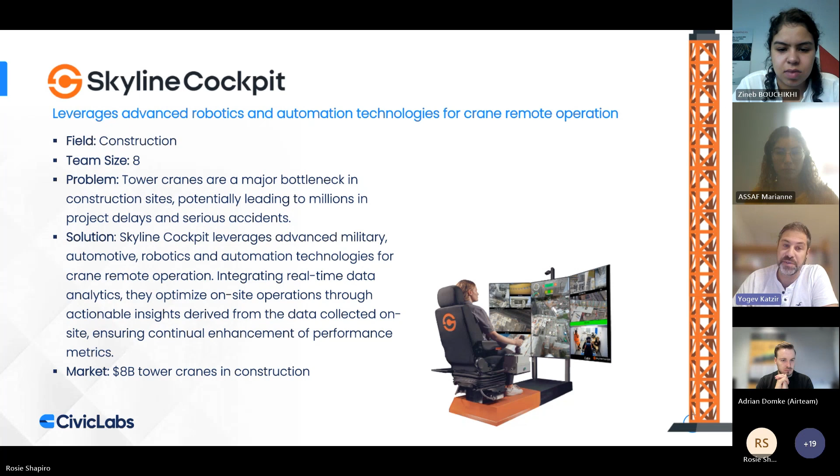The second component of Civic Labs activity includes structured partnerships at the local, regional, and global level. We have created a circle of global strategic partners, the largest and leading business corporations in the industry. We are open to collaborations and invite each and every one of you to reach out, to engage, and to follow our activity on LinkedIn.

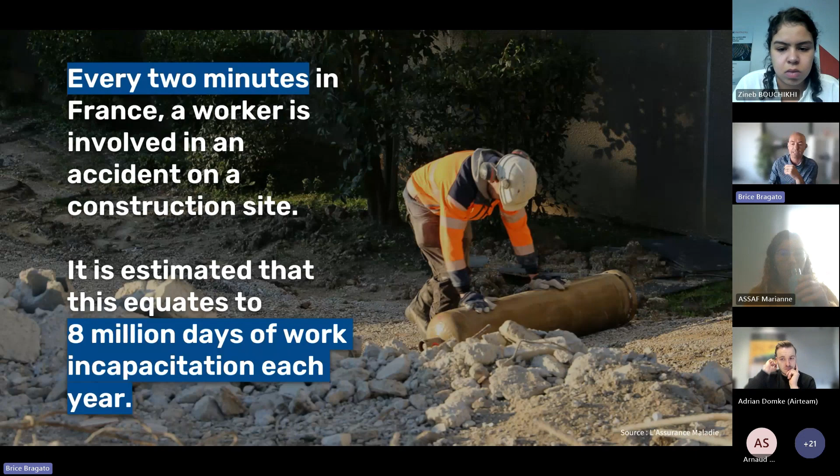To continue on this perspective, to give you a clearer picture: 8 million days lost every year means thousands of team members are off-site daily, causing both operational disruption and safety challenges. That's the most important, of course.

What can we do to make construction sites safer? Historically, safety actions on construction sites have been only reactive - that means we deal with accidents after they happen, and the damage to the human is already done: financial, physical, and emotional. The solution for us is prevention. We can save lives, reduce injuries, and avoid additional costs by stopping accidents before they take place. That's what I'd like to explain.

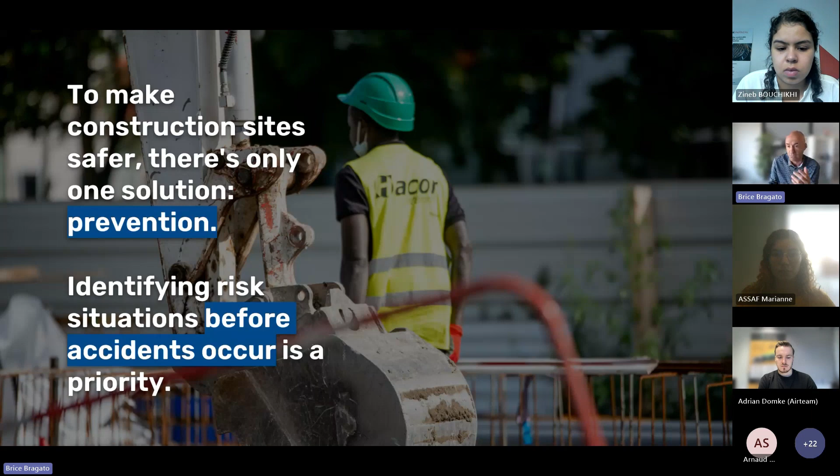This trend is confirmed by major companies in their health and safety policies as a top priority, and the objective is to get to zero accidents on construction sites.

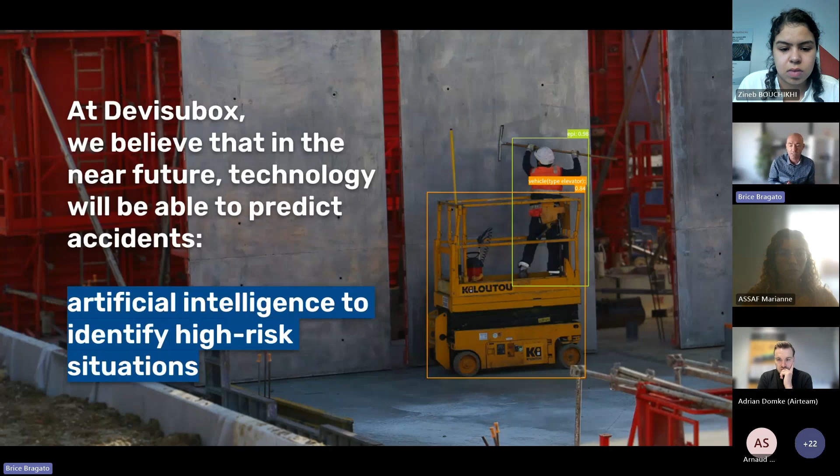This is where technology, and especially AI, comes into the game. Thanks to AI, we now have the capability to monitor construction sites in real time and detect risky situations. AI allows us to focus on risk detection by implementing an automated process, helping human decision-making and safety supervision, and of course catching potential dangers before they happen.

That's why today, after this short introduction, I would like to present you our HSE monitoring platform, and I will use a quick demonstration to show you that.

So I will move to the platform here. Now you are able to see my screen and the HSE application. This application, this platform, is already in production, but only in a dedicated hosted mode, because we developed it 2 years ago to answer a worldwide RFP, which we won. That's the reason why this platform is already in production.

But the goal of Devisubox is to develop a new platform, multi-client, to host all the requests we have from the market. So what's happening with the HSE monitoring platform? First of all, when you connect to the platform, you have access to all your projects - it's like a construction site map. Depending on your privileges and rights, you have access to current projects, past projects, and so on. Today I will show you a project I know as a good example, so I will move into this project here.

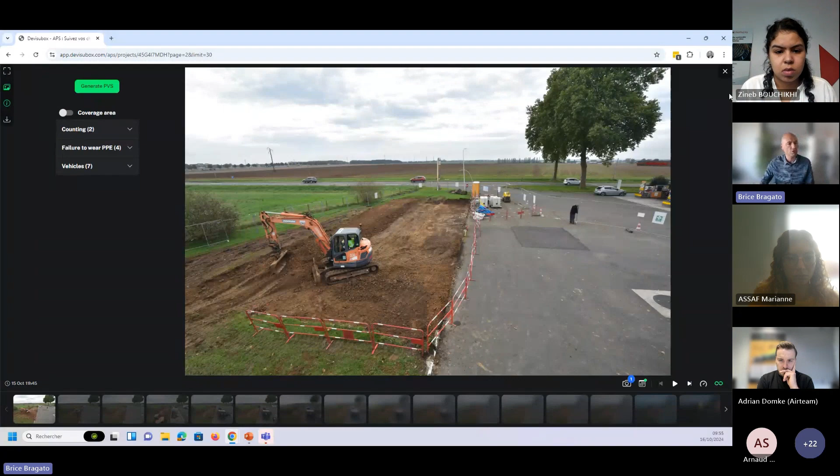At the top of my screen, I'm able to filter what I need to see, what I need to check. For example, if I am a safety manager, I don't want to move picture by picture. Maybe the most important priority on my construction site is to double check if the helmet is being worn properly. So what I'll do is move to the helmet filter with at least one people here. Sorry, mistake, I need to go to my first page. So helmet with people, and I will only see all the images where there is a mistake with the helmet.

I can do the same with the chin strap, the jacket, the harness, and so on, but it's just to show you an example. Okay, so I'll move to my image here. This one, for example, yeah.

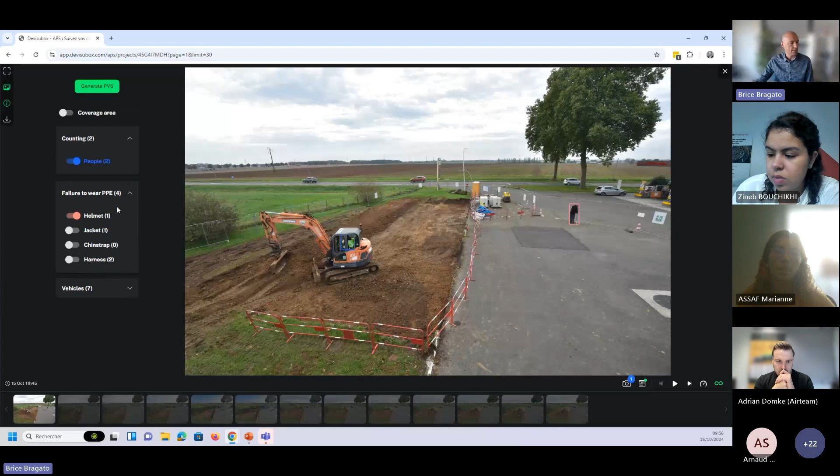On this picture, I can see now that if I supervise the selected image, I can see that my helmet filter is on, and here there is a mistake. So you have a bounding box showing you where the mistake is. And I can, with the action, of course zoom in with the photo camera, and I can see, yes, there is a mistake. That will help me alert all the people on the construction site that there is a mistake with the helmet, for example. Or tomorrow morning, before the briefing, I will be able to sensitize all the people about this mistake.

And I can move into my project. For example, this one, we can see people. The helmet is not okay for the guy in the vehicle, but it's not a problem in this situation. And here I can see people, I have the counting, 2 people, yes, 1 and 2. So in fact, the HSE platform is able to count all the people on the construction site to provide PPE information detection.

And we have the same with the vehicles. If you want, we can blur all the landscape to be focused on the construction site. So that's just an overview of the platform. I will switch now to a presentation because I know I don't have a full hour to show you that. So I'll continue here with the presentation.

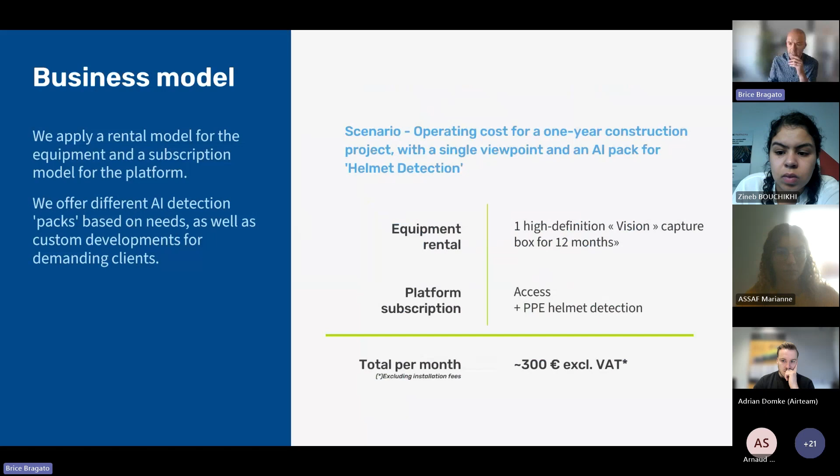And finally, what I would like to say is that at Visibox, we approach AI with the mindset of a startup, innovating, developing, improving and progressing in the market. Our mission, with this project—I'm not talking about the time lapse, we've been doing that from the past to today—what I'd like to explain is our mission is to prevent risks before they happen, and to make construction sites safer for all by providing equipment and AI tools in collaboration with a safety manager.

That's it, it's the end of my presentation. Thank you for your attention, and do not hesitate to use the chat, or at the end of this session if you have questions.

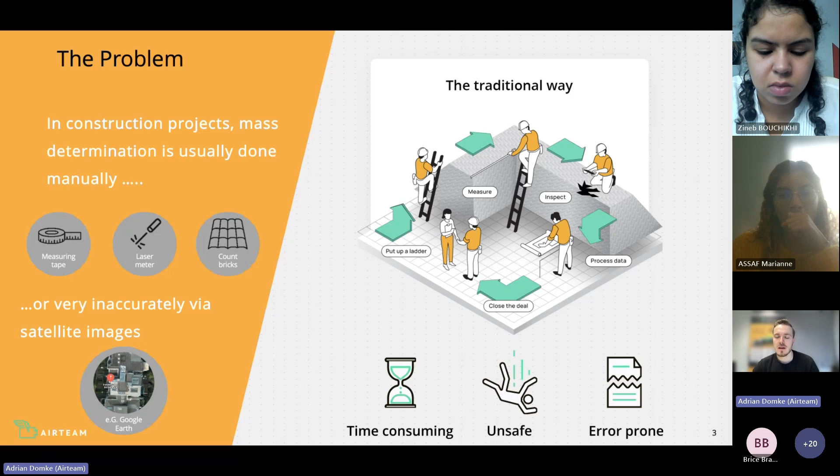This traditional way is causing a lot of problems, hiccups, reworks, and therefore also costs for the people and companies. Besides that, it's time consuming, it's unsafe, as you can see, for example, if people have to go on the roofs, and it's error prone. So if I forgot any measurements, in the worst case, I have to go back to my construction sites and retake measurements. And that's where Airteam comes into the game.

We digitize buildings and structures with the help of drone data, using the drone basically as a tool in order to get the right data. After the drone flight is done - let's say we have a big construction site of around 20,000 square meters, where we can do the drone flight in around 20 minutes - we really quickly get the data, it's uploaded to our platform, and then we use the power of AI in order to provide data that our customers can work with.

What are the pros of this? First of all, it's super fast, meaning it saves me a lot of money, it saves me costs. And my construction workers are actually doing what they're supposed to do, not measuring buildings, objects and structures, but actually doing the jobs that they want to do and that they are there for.

Second, it's safe, because no one has to take any risks in order to take measurements or get data from the construction sites. And it's standardized, so you get very high accurate data, very fast and in the safest way possible.

I just want to show you some reasons why drone data is the future of construction planning. Just really quick, some comparisons - let's talk about satellite data and drone data. As you can already see in the pictures, the high resolution of the drone data enables us to get much more information than we have with satellite.

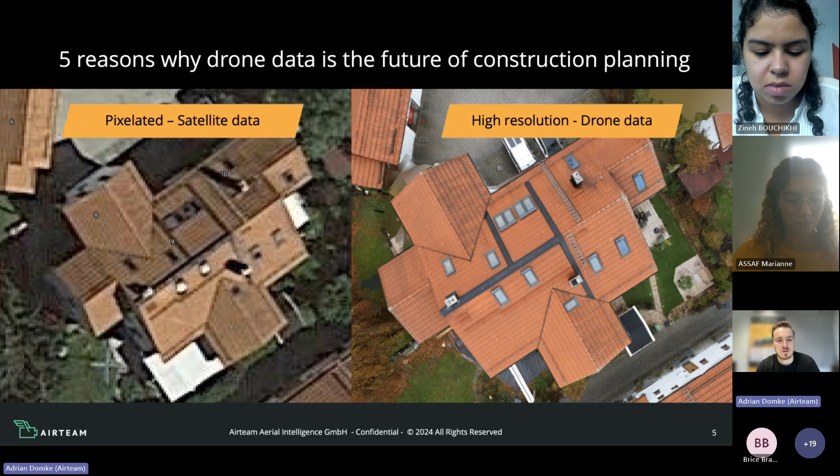Second one is that 2D data is well known among the industry already, and with the drone data you can still create the wow effect - meaning you can, for example, zoom in, zoom out, move around the object. You basically have the real time and real live data from the object that is absolutely up to date.

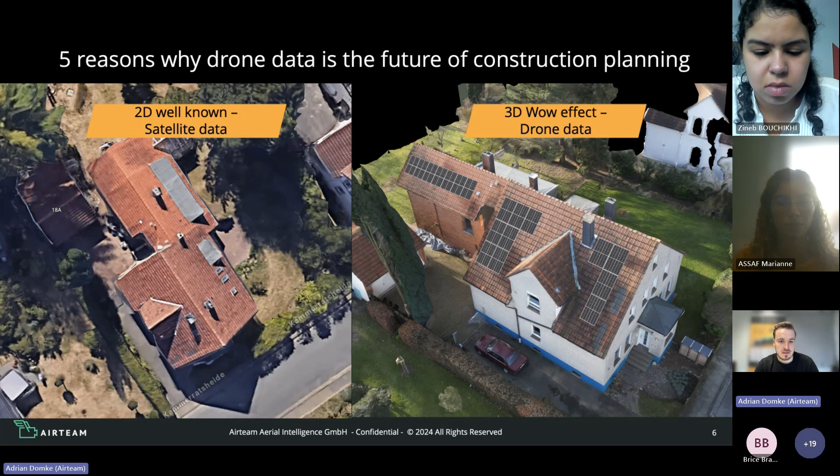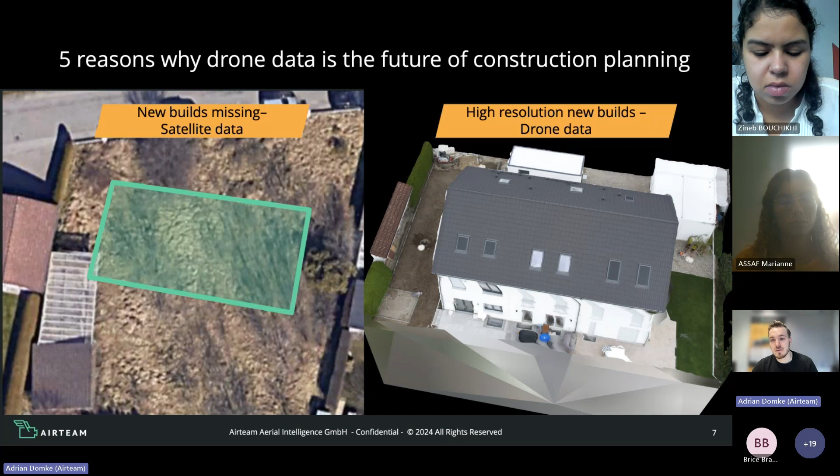Besides that, if we're talking about satellite data, new buildings are often missing. Let's say we want to plan a solar installation on this roof, but we don't have any data to actually plan it on site - so what would we do? We'd have to send people on the roof again. With drone data, we have high resolution data even from a building that was built today or is still under construction.

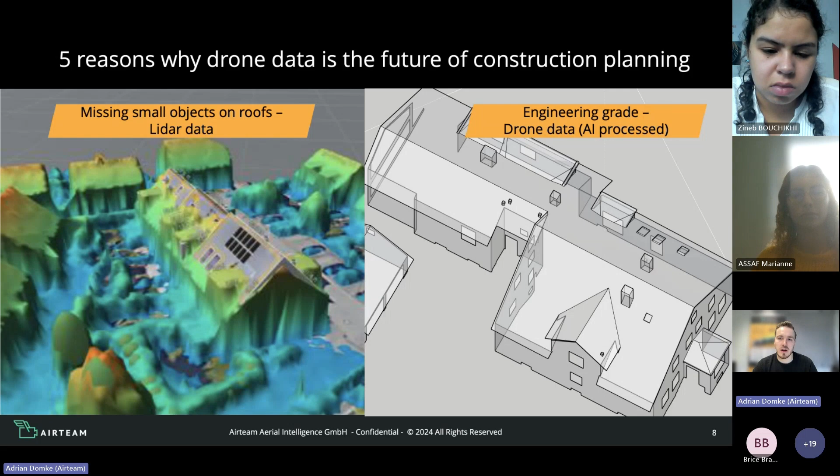And if we're talking, for example, about LiDAR data that is scanning the objects with the laser, we are sometimes missing small objects on the roof because it's not accessible or whatsoever. On the other hand, as you can see, this is already AI processed - we have engineering grade drone data that is usable for our customers.

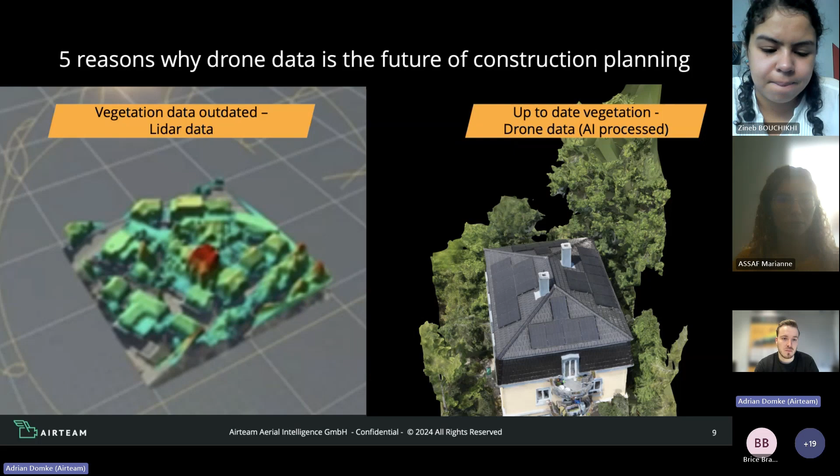And talking about solar installation, just really quick, we have up-to-date vegetation data, meaning we know how high is this tree actually next to the house, and can I put a solar module there, or is there shadow on the roof the whole day?

So why is the solution worth looking into, and why is it such a big topic now? We talked about safety already before. We're talking about accidents and death that can be eliminated basically. Facilitation of work: the construction site is much easier, and it's much easier to prepare quotations, deploy planning, invoicing, etc.

We have a shortage of skilled workers, at least in Germany. It's a big topic in other European countries too. You can increase your efficiency with the drone. Then fourth point, drone technology: prices have fallen from around 10,000 euros 5 years ago to 1,500 euros, making it a technology available for every company out there, from 5 employees to 5,000 employees.

And the power of artificial intelligence. I know AI is a big buzzword, but we're actually developing algorithms based on artificial intelligence and machine learning that make use of this potential in order to provide data. What did we develop? We developed the AirTeam Fusion platform, a cloud-based platform that turns drone imagery into digital twins to generate actionable insights.

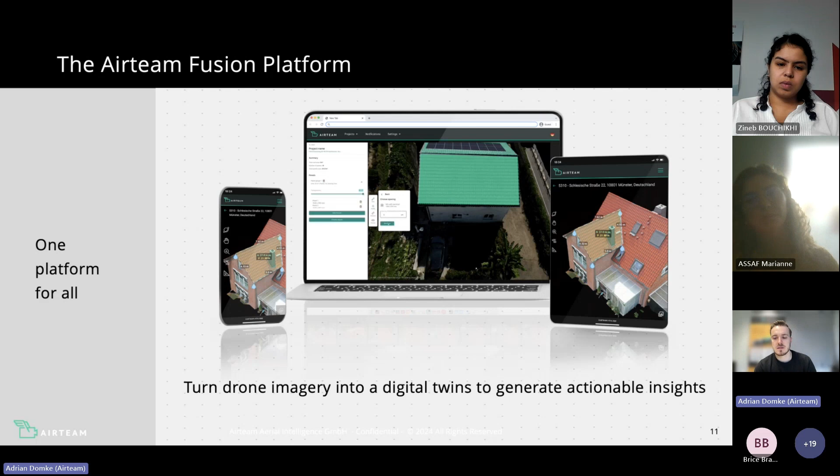So it is always accessible from anywhere with every device. And how does it work? Basically, our customers create a new project. They do the drone flight, or we do the drone flight, the data gets uploaded, and then we come to the point of data evaluation, meaning this is where our software comes into play.

First, we create a 3D model. We have the software doing edge detection, like defining length, surfaces, etc. We have object recognition, we can create CAD models, and basically a semantic classification.

As you can see here, we provide different kinds of files. We have a lot of solar planning integrations. We can provide CAD data as seen on the left side. We have measurement reports that are DIN certified, which is basically standardized. We have Fast Fusion 3D models where you can take measurements, do solar planning, everything right in a 3D model, and of course roof planning integrations.

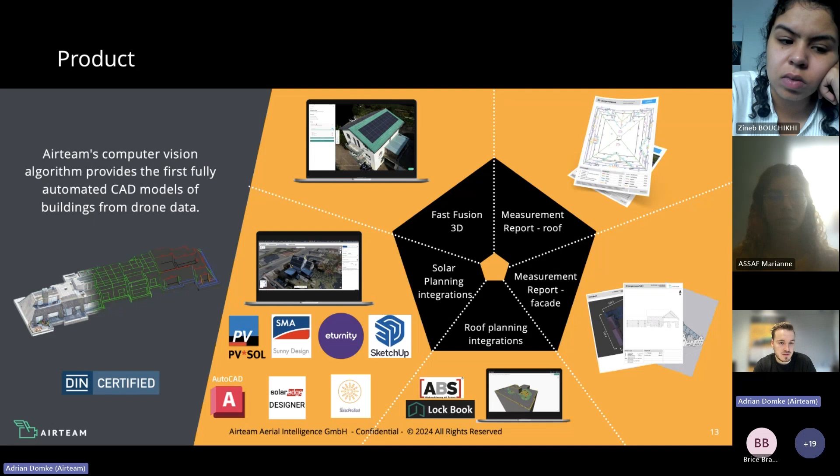I talked about the benefits already, and I don't want to take too much time. You can save time and money, you can secure competitive advantages against other companies. You can decide who flies, meaning either you fly the drone yourself or Airteam has a drone pilot on site, and we have skilled customer service who can always assist you around the clock with all the data.